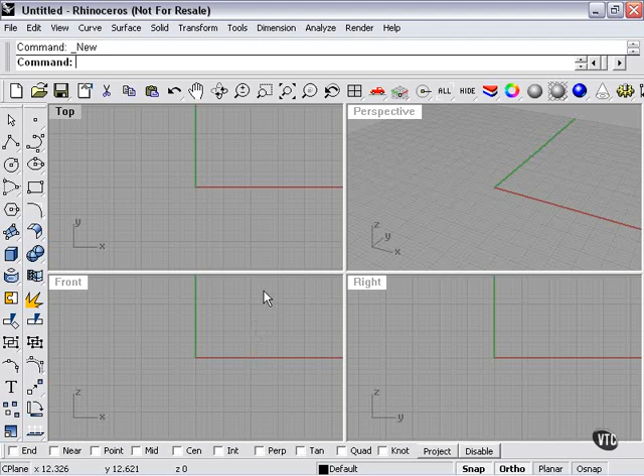In this section, we're going to be continuing to put into practice what we've learned, and I'm going to show you how we're going to create a dining room table. We're going to be looking down from the top. So first I want the square, or rectangle, for the tabletop. For that, we're going to use our rectangle tool.

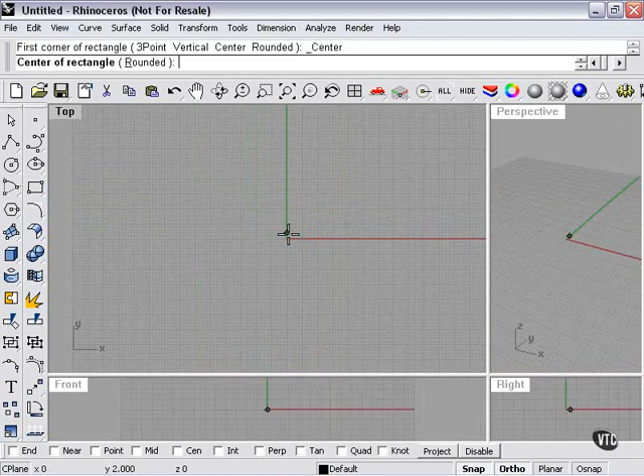But I'd actually like to start with a center to corner rectangle. That way I can be sure all sides are equal. So as you can see here, I don't really have to eyeball this because it's showing me everything is equidistant from the center. So that looks about perfect.

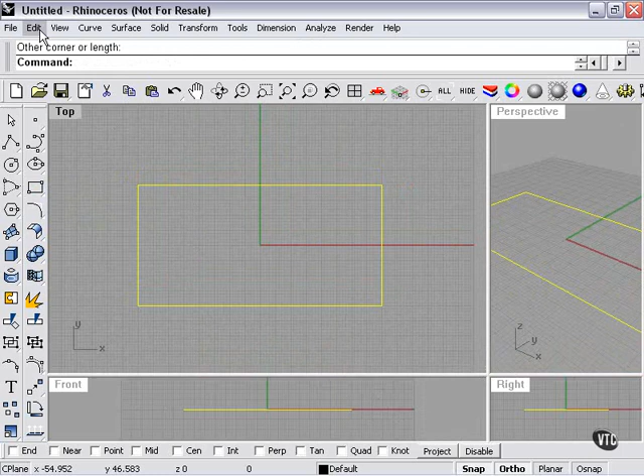I'll click there. However, we want our dining table to be a little bit fancy. So this hard-edged rectangle isn't going to work. I'll go to Edit, Rebuild, Point count of 12. Let's try that. You can see we've got a nice, softer edge here.

Now we need to create the profile curve for our dining room table. For that, I'm going to use my control point curve here. Turn off ortho so I have a little more freedom of movement, but I'm going to zoom out a little bit. I'm not concerned with making it exactly the right size yet, because I want it to be pretty detailed.

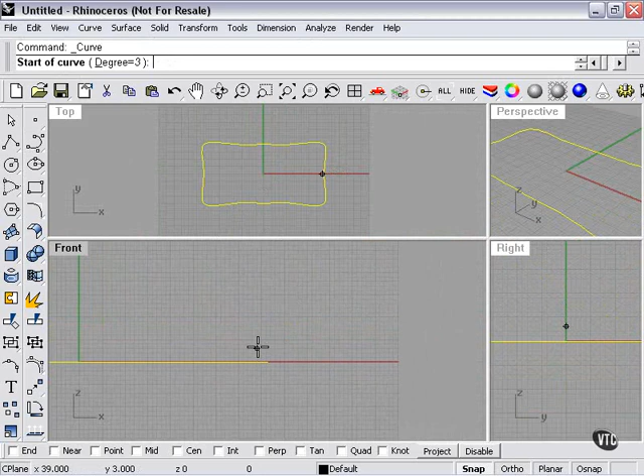So if it starts somewhere in there, then we're going to come back here. Then I'm actually going to right-click to finish the curve, right-click again to pick up a new curve, right where I left off. And again, I right-click again to start another curve. I keep left-clicking to put down points. And right-click, and we're finished.

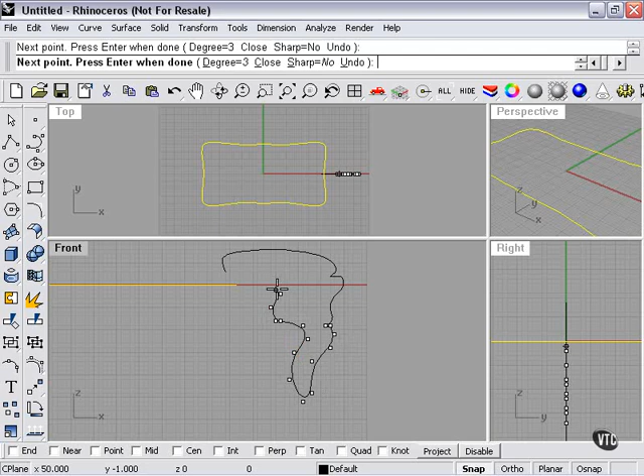Now here, this is kind of not looking quite the way I want it, but what we're going to do first is join our curves, turn on our control points, and I'll move that point one more forward to there. This point here, what I'm actually going to do is delete it to make it a little softer. And so that's looking good.

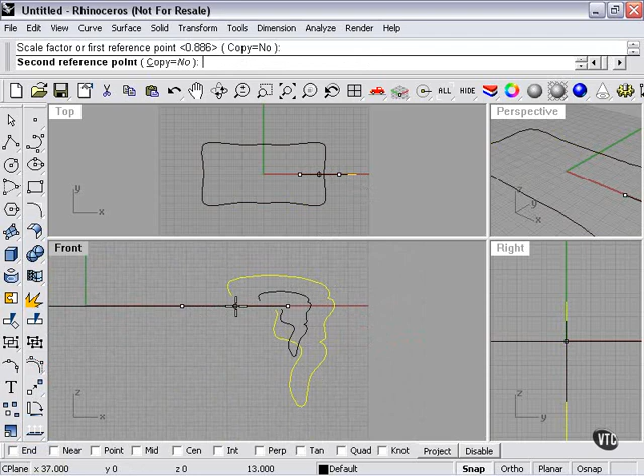Now as you can see by our top viewport, this curve is much too large. I'm going to right-click for my two-dimensional scale since I don't want the curve to move around. I just want it to shrink in my front viewport. And let's see how this looks now in our perspective. Still a little too large.

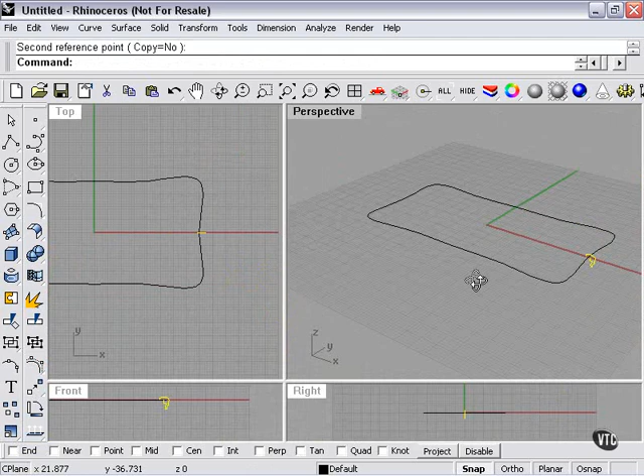We want this to be a pretty massive table. Right-click my scale tool. We'll go down to about there. And that looks great. Now I'm going to save table.